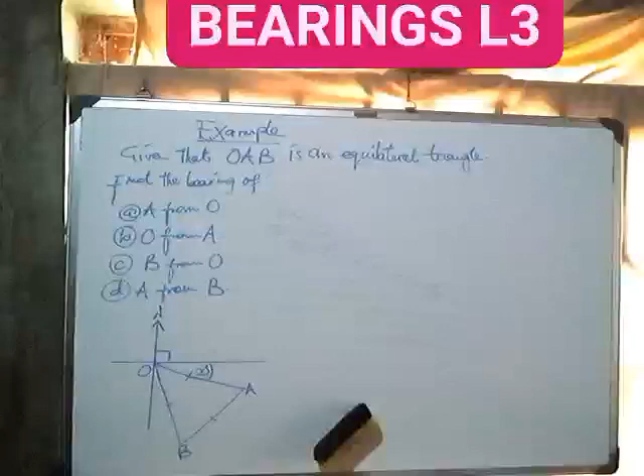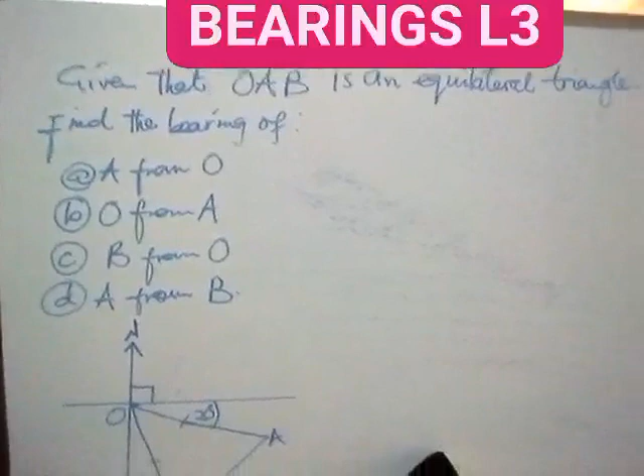We continue with some examples. This example is saying, given that OAB, this is O, we have our A and also B. Actually, you can see it. This is a triangle. It says it's an equilateral triangle.

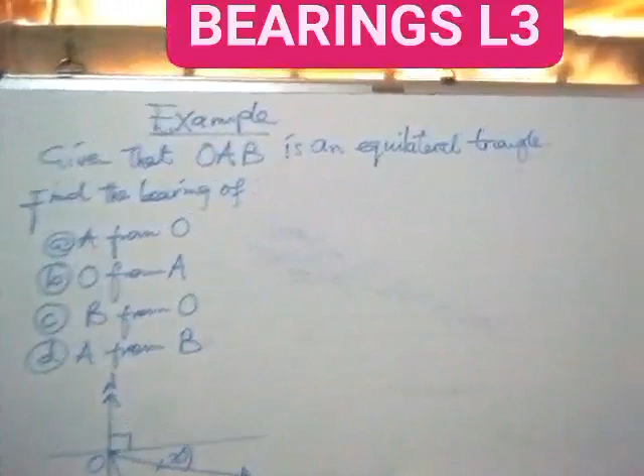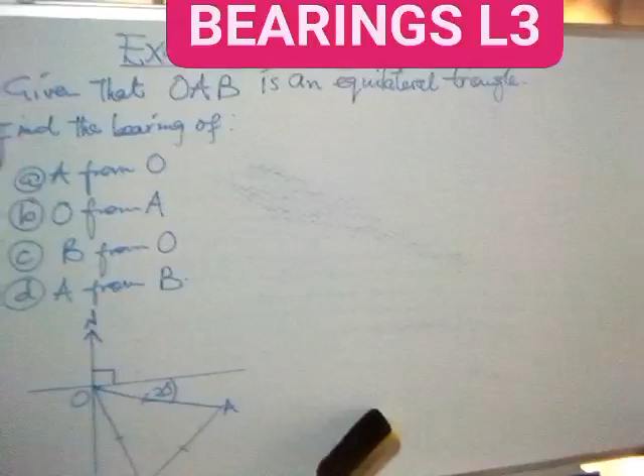So when you talk about an equilateral triangle, it is a triangle which has equal sides and also equal angles. So meaning angle B, angle A, angle O there are the same, and also the sides are the same. What are we trying to say?

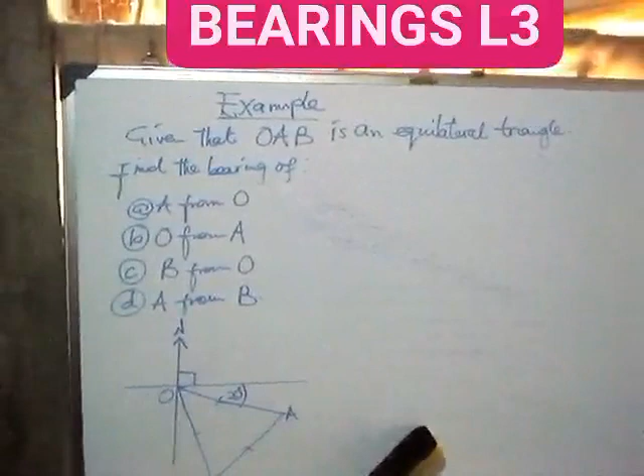If they are the same, what you should know is that angles in a triangle add up to 180. So this means that we can know angle B, angle A, and angle O by saying 180 divided by 3, because a triangle has got 3 angles. So we can do that to find the angles of this triangle, because it is an equilateral triangle.

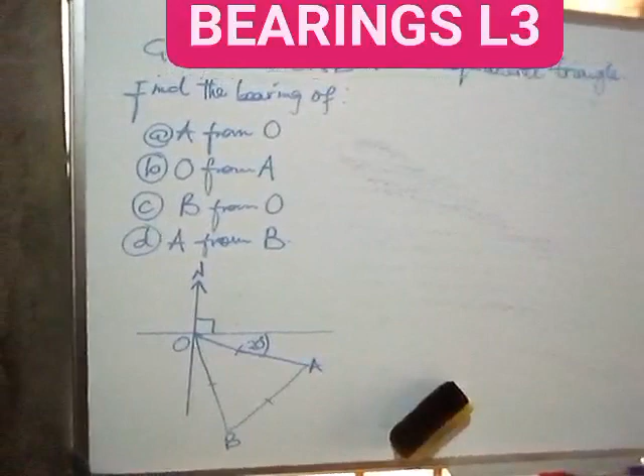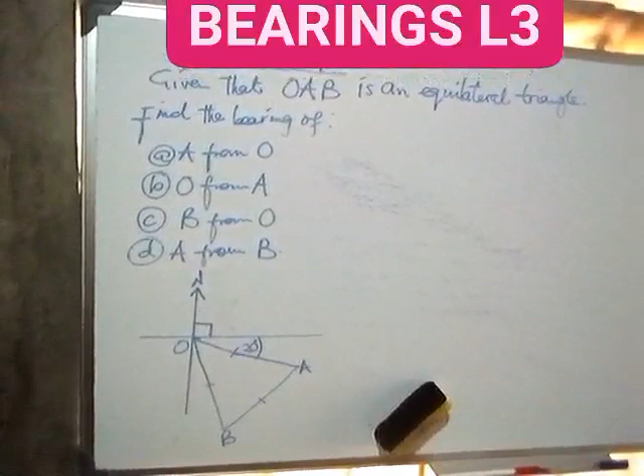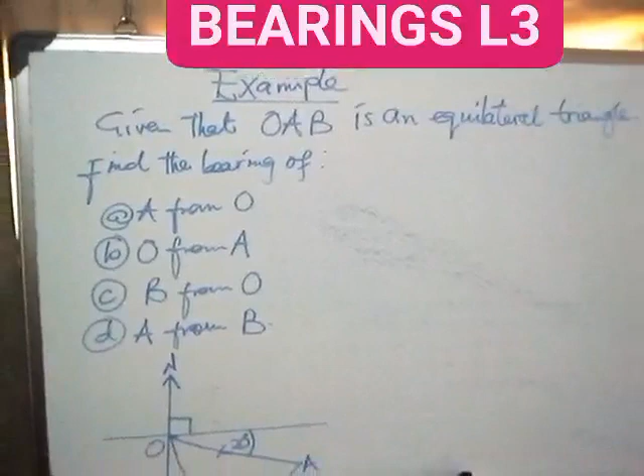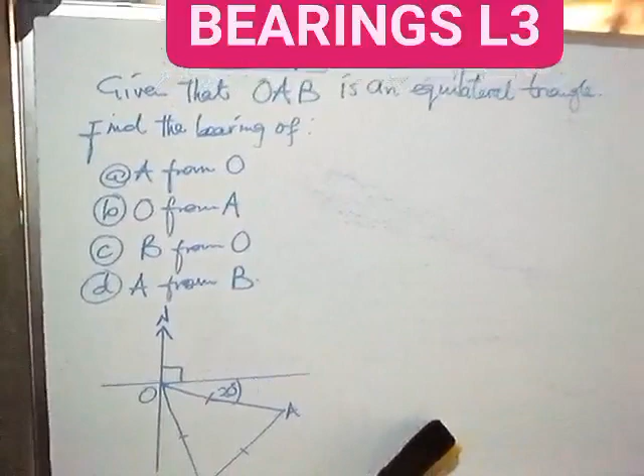Now the question is, find the bearing of: (a) A from O. So where is our A? We are able to see where the A is. Then (b) O from A. Then question number (c), B from O. Question number (d) is A from B. So let's see how these questions can be worked out.

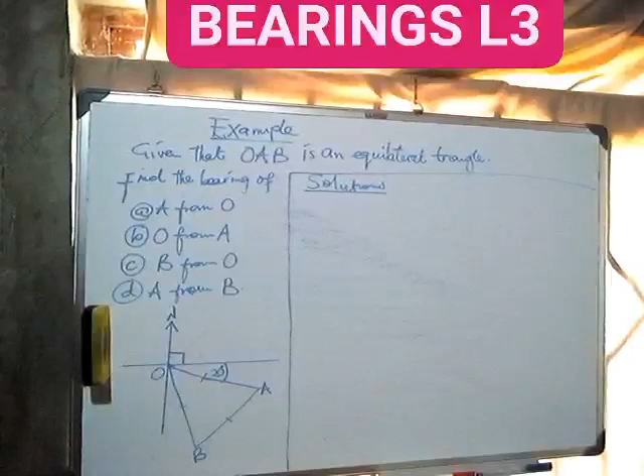So now we start by finding question number A. We are finding A from O. So we draw our O. Our O is here. Then we have the north there. Then we have the A. So this means that we are moving the direction from O up to point A.

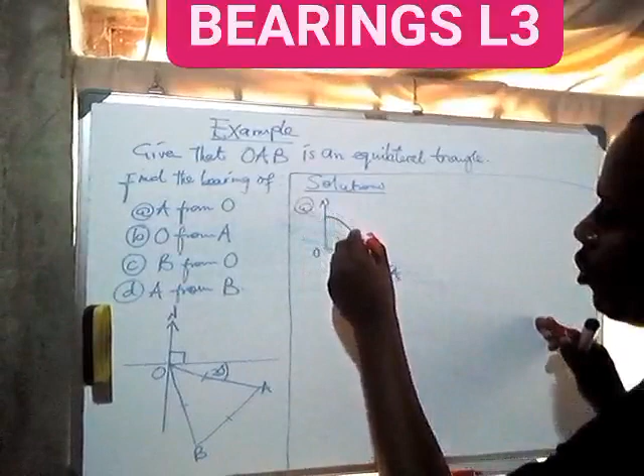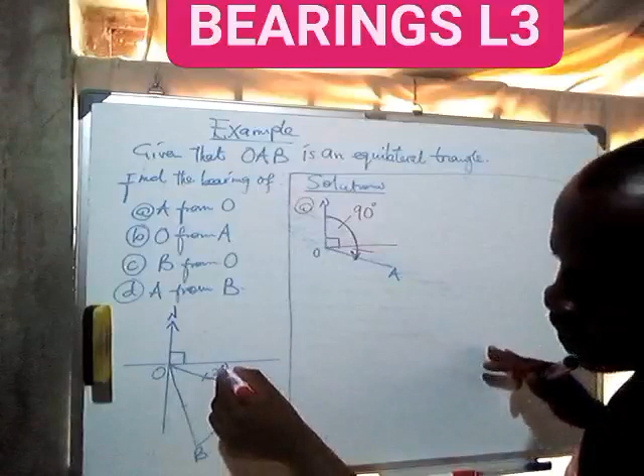Mind you, we have another line there which has been named as 90 degrees. So this means that just this angle alone is 90 degrees. Then we have another angle here which is remaining in order to form a bearing of A from O. This angle there is 20 degrees.

So therefore, our A from O is equal to 90 degrees plus 20. So the final answer will be 110 degrees. So this is what we have.

Now we go to question number B. We are finding the bearing of O from A. So as usual, we are going to have our O. Our O is somewhere here, and we have the north there. Then we have our A. Our A is somewhere here.

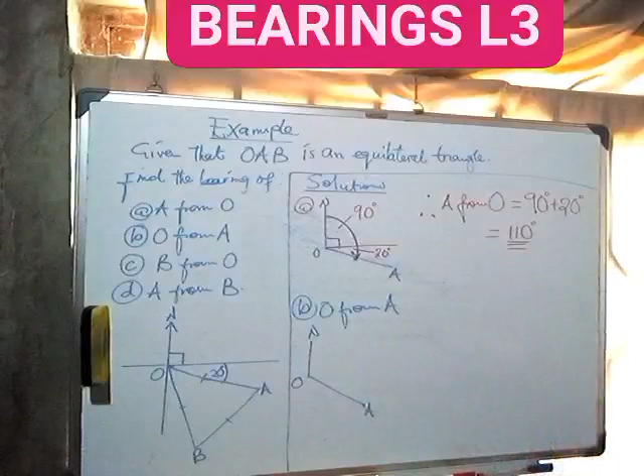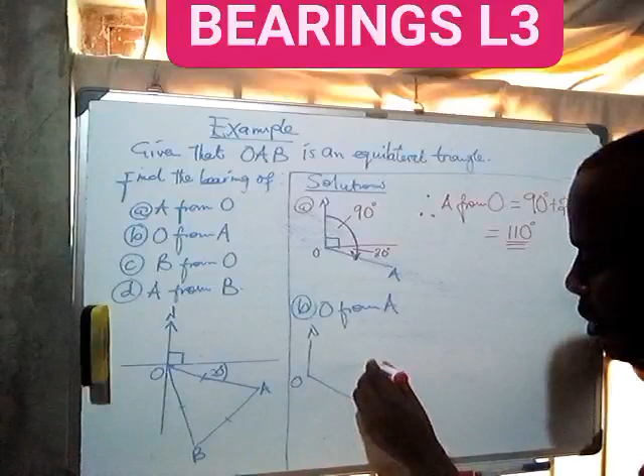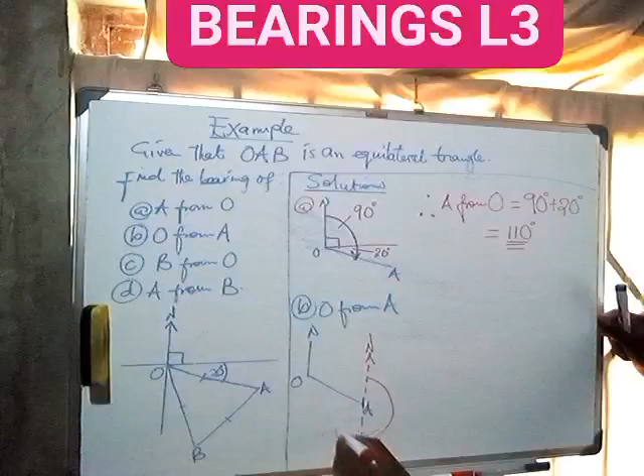So for O from A, this means that at A, we are going to draw our north like this. This is the north we are going to have. Then we can even extend it like this. Then we move clockwise until we meet line OA.

Now, just this straight line here. Remember from the previous video, we said this line here is 180. This line is 180, meaning we are remaining with this. So we are going to say 180 plus x. What angle is this? So we have to know this angle.

Now, there's another principle. Of course, we can use the principle from the previous video, but we have the principle which says alternate angles are equal. So this angle here is the same as this angle here. This means that the angle we found at O is the same as the angle we are looking for, which has been represented by x.

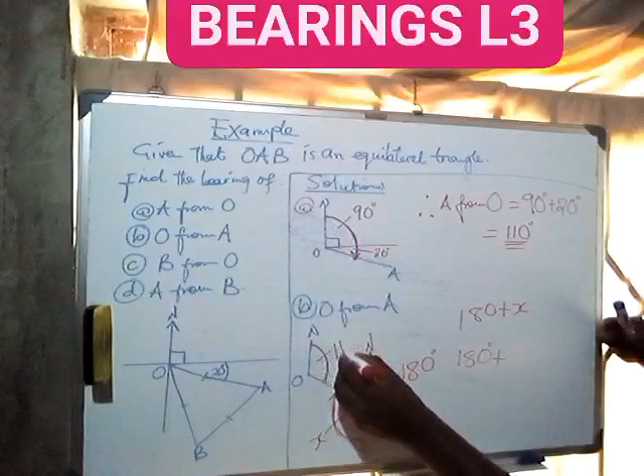So we are going to say 180 degrees plus, instead of putting x here, since this angle is known, 110. So 180 plus 110: 0 plus 0, we have 0. 8 plus 1, we have 9. 1 plus 1, it will be 2. So our answer will be 290.

So we're going just to say, therefore, O from A is equal to 290 degrees.

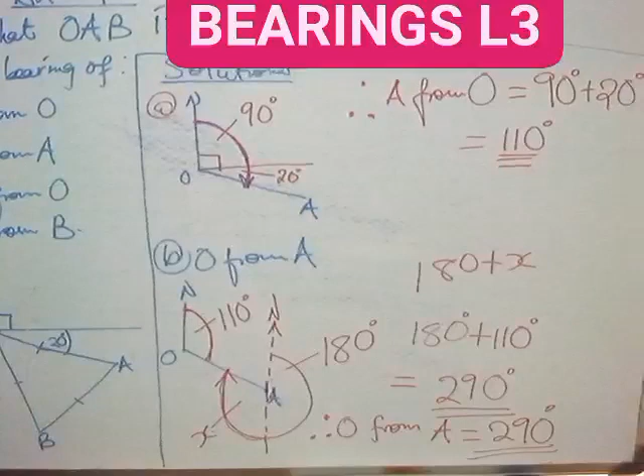290 degrees is the answer for question number B. Now we go to question number C. So as usual, you can pause your video and resume after you are done with the copying.

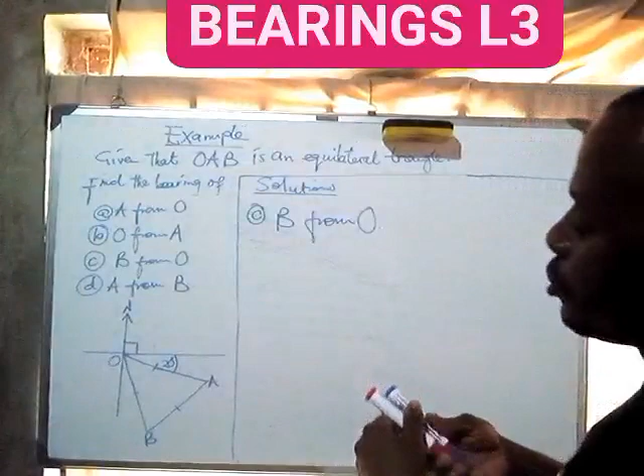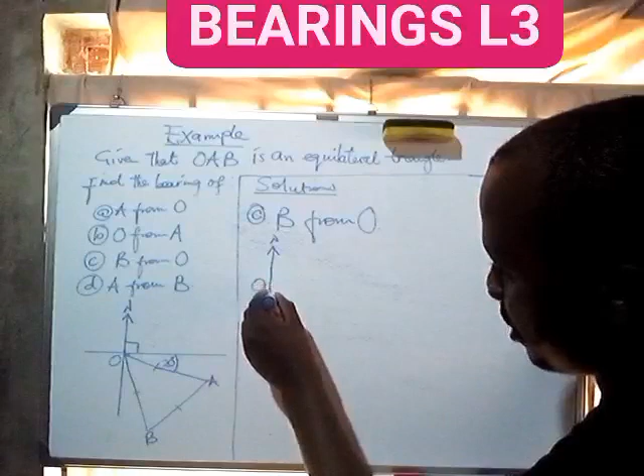So question number C, we have B from O. So as usual, we are going to draw our O. I'm sure we know where our O is. Has got the north there. Then now we have our B, because our O is like this. Then we are going to have our B is also like this. This is where our B is. So the bearing is B from O. B from O. So at O, we draw the north, which is there. Then we move clockwise direction, not until we meet line OB.

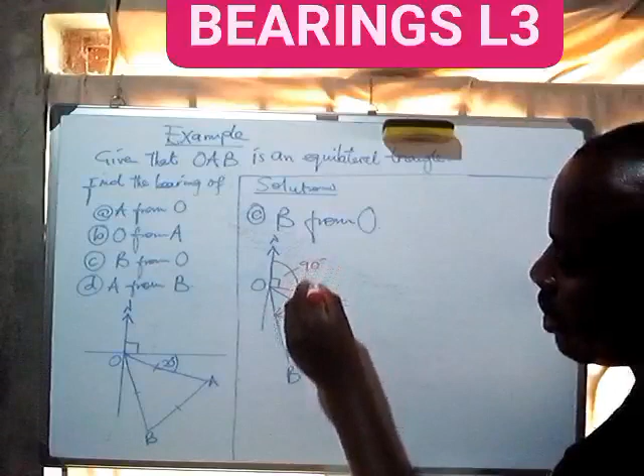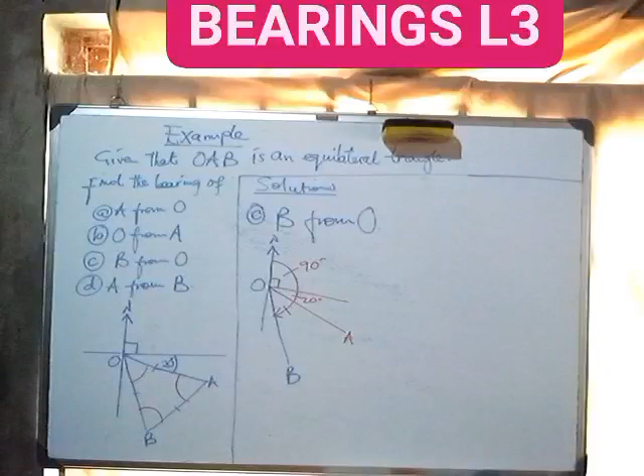Now remember, this one has this, which is the A, and also it has this, which is 90 degrees. So we have 90 there, which is 90 plus, this is 20, then plus, what is this? What angle is this? Remember from what we were discussing earlier on, we mentioned that this is an equilateral triangle, meaning for us to find an individual angle, we say 180 divided by 3, and it gives us 60. So this means that this angle here is 60 degrees.

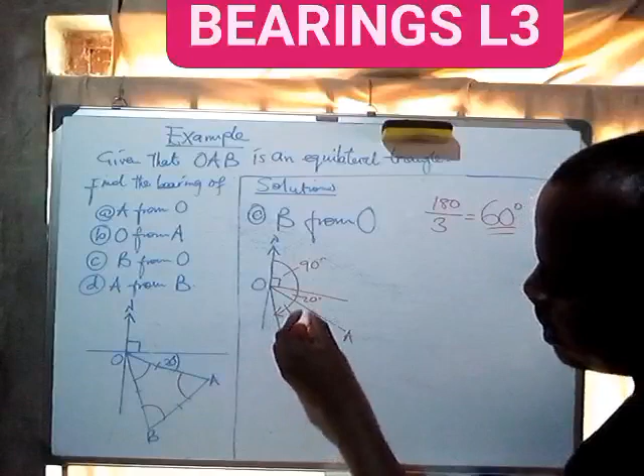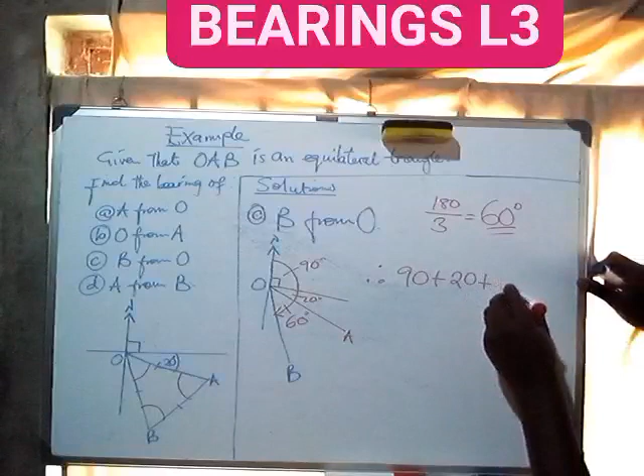So therefore, the answer will be 90 plus 20 plus 60. Or, because 90 plus 20, we already got it by saying 110. So it will be 110 plus 60. And our final answer will be 170 degrees. So to formalize it, we'll say the bearing of B from O is equal to 170 degrees. This is what we are going to have.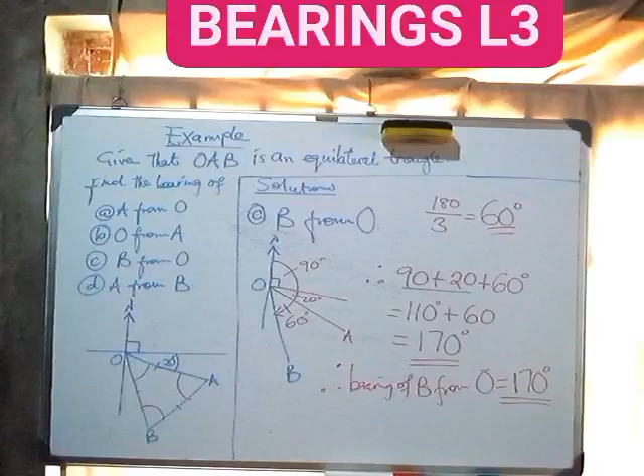Let's go to the next question, which is question number D. So as usual, you pause, you finish copying, then you resume your video. So the last question is the bearing of A from B. This is our A. Then this is our B. So they are saying A from B. This means that we draw our north at B. Our north will be like this. This is our north there. Then we move this direction.

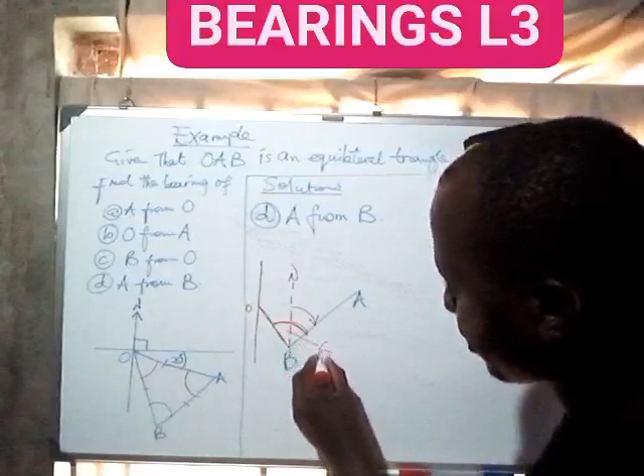What angle is this? Remember, the whole lot of B from O, somewhere there, the whole lot of this is 60, angle 60. Now, to know the bearing of A from B, we have to say 60 minus the angle which is here, this point there. So that is what we are going to do. Now, how can we know this?

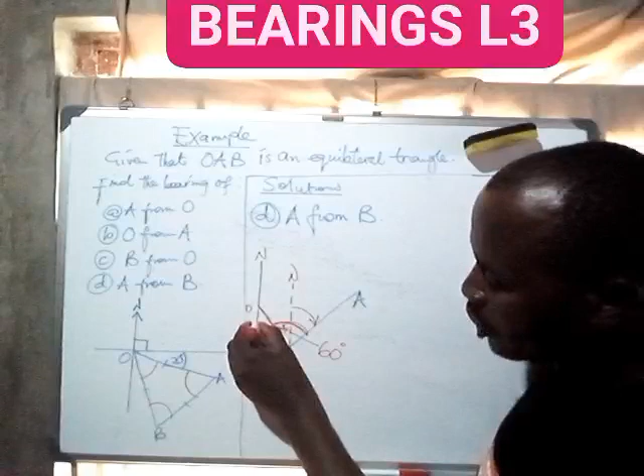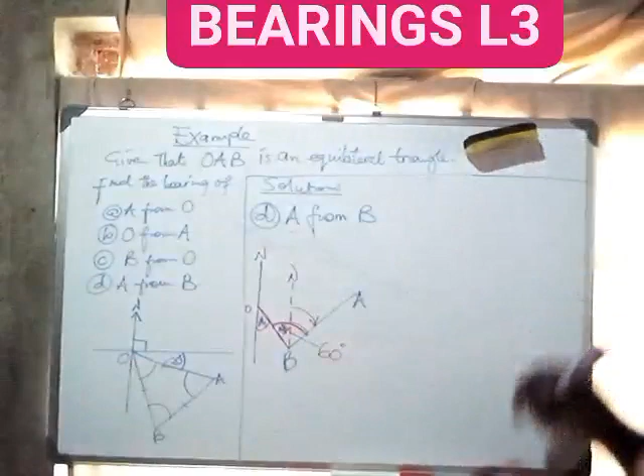Since this is our O, we can use the principle of opposite angles. What am I trying to say? I am saying this angle here and this angle here are the same. Now, how are we going to know this angle? This angle here can be known by saying the whole lot of this up to here. Because this is a straight line, it is 180, meaning from here up to there, it is 180.

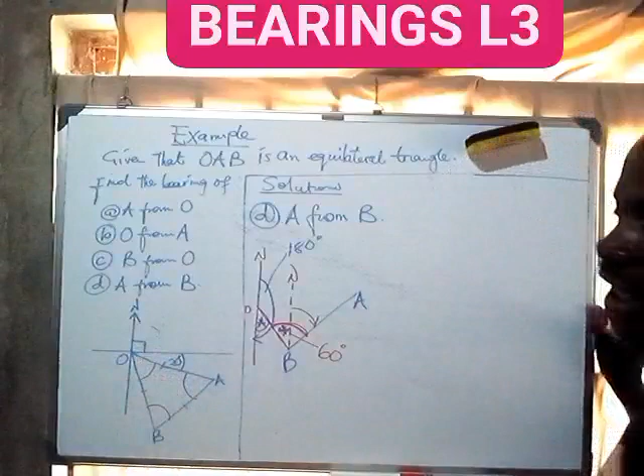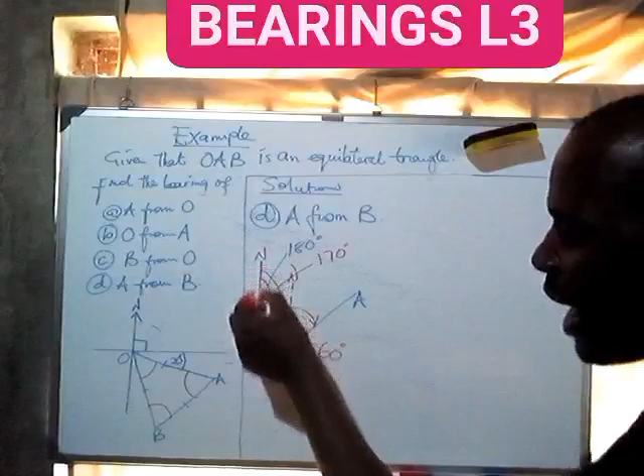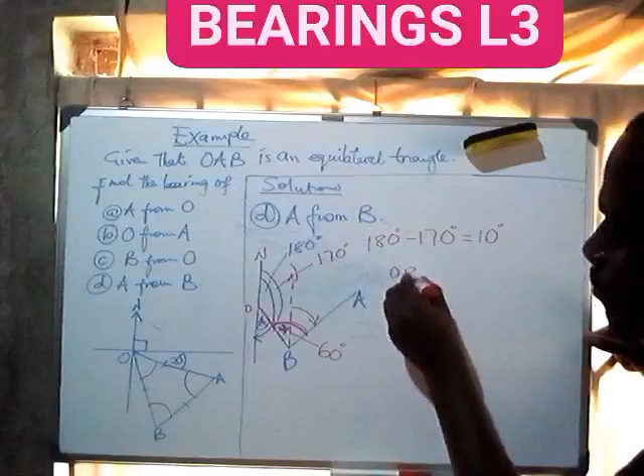Now, from the previous question, which is question number C, we found that the angle from O up to B is 170. This means that if the whole straight line is 180, and from here up to here is 170, the remaining angle is 180 minus 170 degrees, which is 10. So this angle here is angle 10. This means that angle OBN, this O and this B and this N there, is also 10.

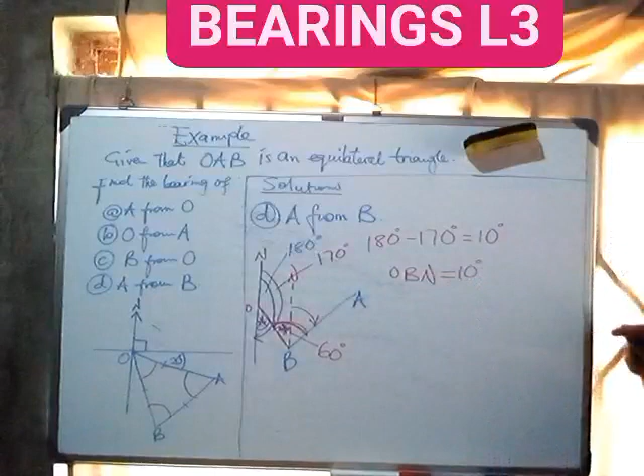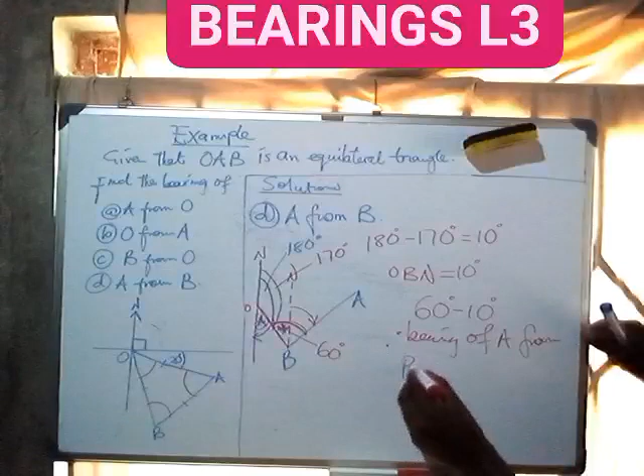Now, if this is 10, the remaining angle which we are looking for, the bearing of A from B, will be 60 minus 10 degrees. So therefore, we are going to say bearing of A from B is equal to 50 degrees. Since bearings are in 3 digits, we are going to include a 0 there: 050 degrees. So this marks the end to our example.